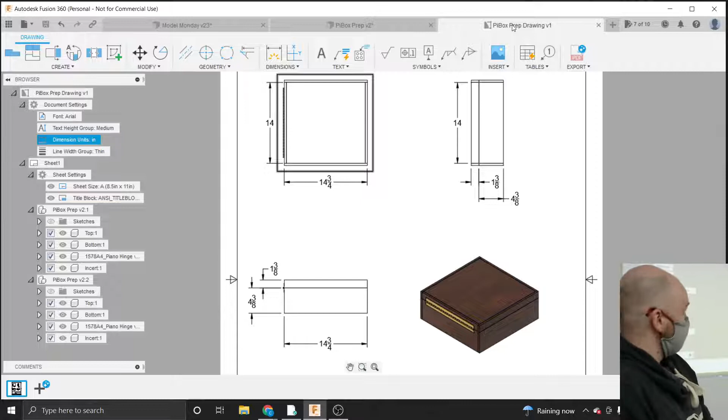Today our project is going to be a fairly simple box - a nice wooden box. Pi Day is coming up on March 14th, and I like to take pies places and share them with people, so I need a box to take that pie places. So I made one. I designed it here in Fusion, and in order to make it in the wood shop, I generated drawing files so I can actually make this thing physically. Without further ado, let's get started.

Let's save that. I'm going to close both of these files, and start a brand new design. This new design is going to be our box. My approach for this box is going to be parameter based.

I like doing these parameter-based projects because for a box, you can put anything in a box, literally. So I'm going to think about this as a box you can put anything in, if you know what size that item is. So instead of starting by drawing things, we're going to start by setting parameters for what's going to go inside our box, and all of our box dimensions will be determined by those parameters.

I'm going to start by clicking on Modify and then coming down to the Change Parameters option. Normally when we draw things, we say let's make a rectangle, and then tell the rectangle how big we want that to be in inches or millimeters. In this case, we are going to type in a user parameter for a dimension.

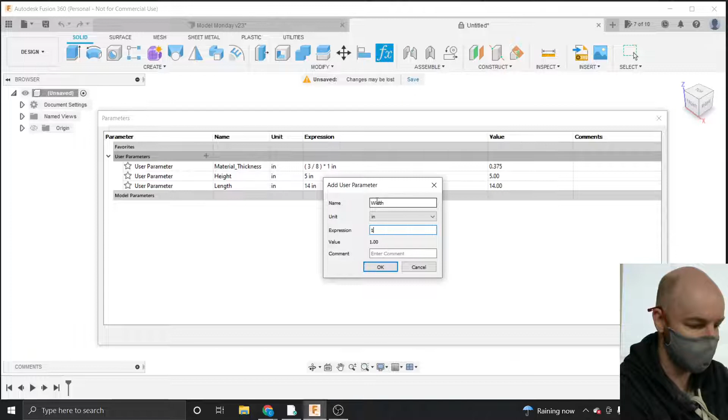Now it's easy to change these parameters and alter our box to fit whatever we want to put in it. So if you got a mug or a coffee grinder or a water bottle or a cell phone, you can measure that object and enter those parameters here for height, length, and width. Specify the thickness of the material you're making, and it will go ahead and alter that box for you. We'll test that at the end of this class, I think.

Does everybody have those 4 parameters dialed in? You guys good at home too? All right, cool. I'm going to go ahead and click OK. And now we can put those parameters to work.

From our Create menu, let's go ahead and choose the box option. A lot of times we start by creating a sketch, but I think in this case it's just easiest to start with a box.

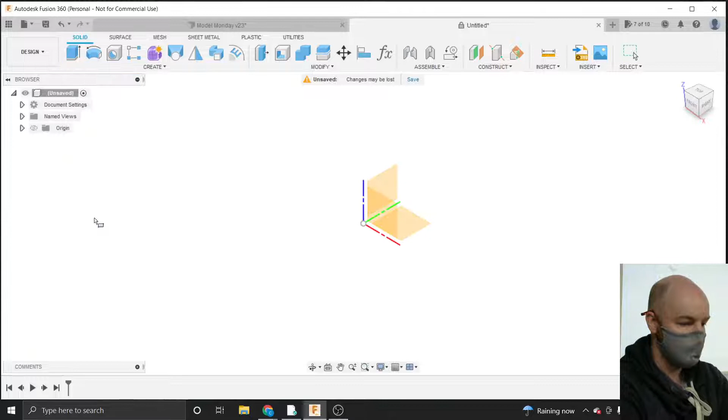Now our box, even though it's a 3-dimensional object, we need to start with a 2-dimensional surface to create the first measurements for our box on. This is a little counterintuitive, but you just need to specify one of these 3 drawing surfaces to start your box on, and it doesn't really matter which one at all.

I'm going to choose this surface that is my top here. So if I want to make sure I choose the top, I can click on the top over here in my navigation cube, and then I'll just spin down so I'm looking straight at it. And now I won't accidentally click on a different plane here.

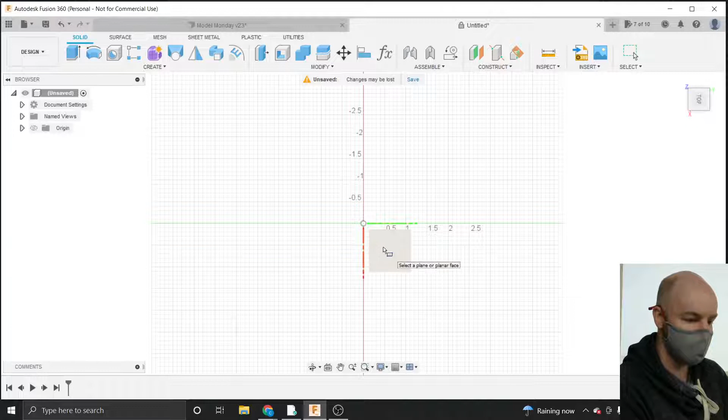The beautiful thing about Fusion is it gives you lots of tooltips. So if I'm ever unsure what to do, if I just stop moving my mouse, it'll tell me here. So right now it says place first corner. So I'm going to do that.

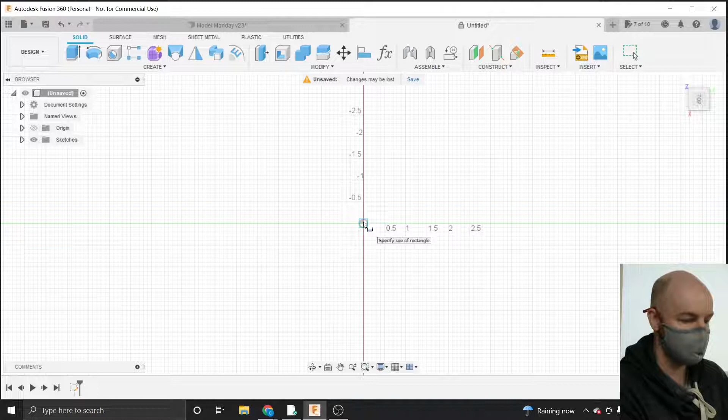I'm going to place the first corner right at the center of where the X and the Y axis meet there. That is the origin. And I'm just moving my mouse out. It's not a click and drag, but it's a click and move.

Now I always encourage people, once they see numbers, they should type numbers. So let go of your mouse and just start typing things. And we could type in like 12 inches, for example.

However, we spent all that work defining parameters. So I can define, if I start typing in length there, you can see my length, any parameter that's got an L in it, apparently, will just pop up there. So length is the one.

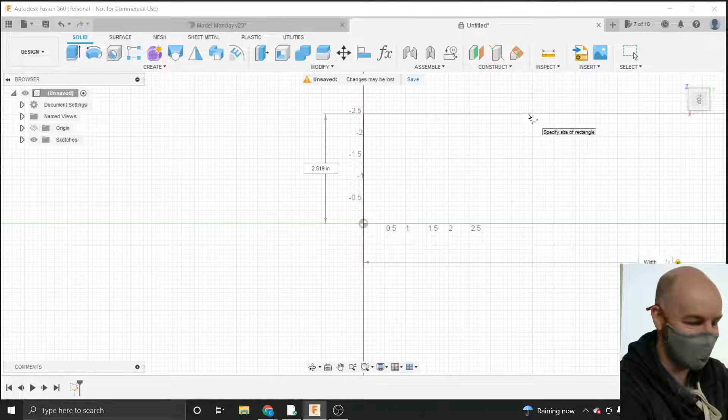Actually, I'm going to make this my width. Oh, did I mess you up, Mike? All right, so width, and then I'm going to hit the tab key to bounce over my other measurement, and length is going to be my other measurement.

Really, these are interchangeable because they're the same units right now, but all right, and now we've got our length and our width specified there, and if I click, now it gives me my box window finally.

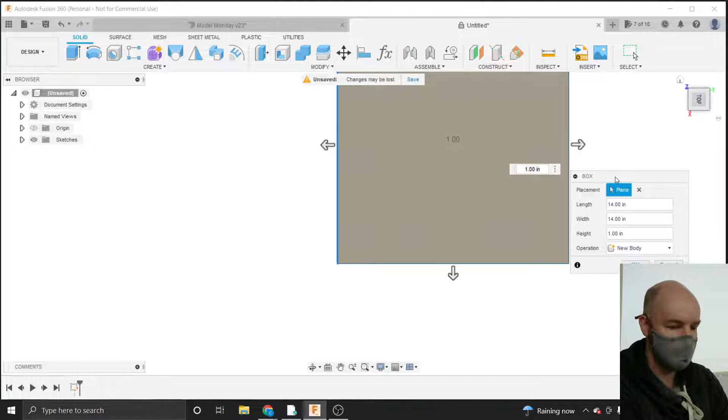And if I navigate my navigation cube in that top right hand corner and zoom out and zoom in so we can see this a little bit more 3-dimensionally, now you can see I've got a height measurement that I can enter in here, and that height measurement is going to be my user parameter that I created that's called height.

Now it goes ahead and converts some of these user measurements for you right away, but I can go ahead and change these so just so you're sure that I entered in length, width, and height. Those are those user parameters that I created for my length, width, and height of my object. In this case, nice delicious pie.

So once we've got those 3 measurements in, I can go ahead and say OK. All right, so we've got a box here. We've got a cube, I suppose you could say. Does a cube have to have equal sides? Anyway, regardless, we've got a 3-dimensional object here.

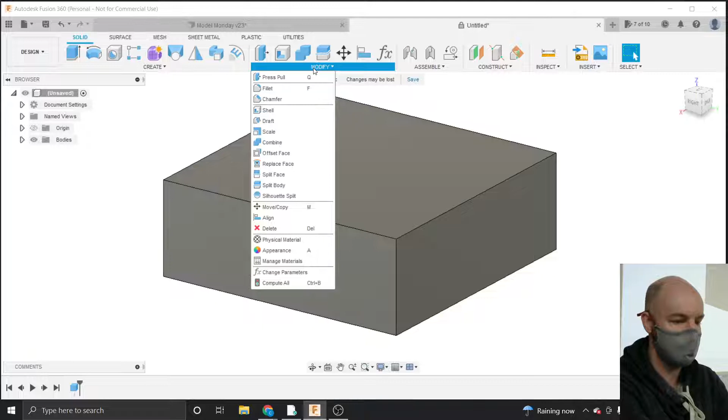And in order to make our 3-dimensional object hollow, like a box is, we can use the shell command. There is a single command in the modify menu that will take this box, this cube, and make it hollow. So if I click on modify and then come down to this shell option.

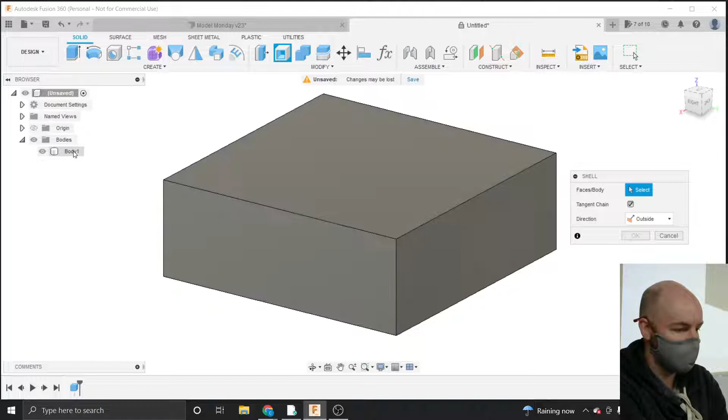Now I could specify one of these faces, and that would make kind of like an open box, but I want to have a closed box here. So instead of specifying one of the faces, I'm going to specify the body that I want to make a shell of. So in my bodies folder over here in my browser on the left hand side of the screen, if I spin down my bodies folder, I got a body inside of that, and if I hover over it and click on it, it'll choose that body in my shell window here.

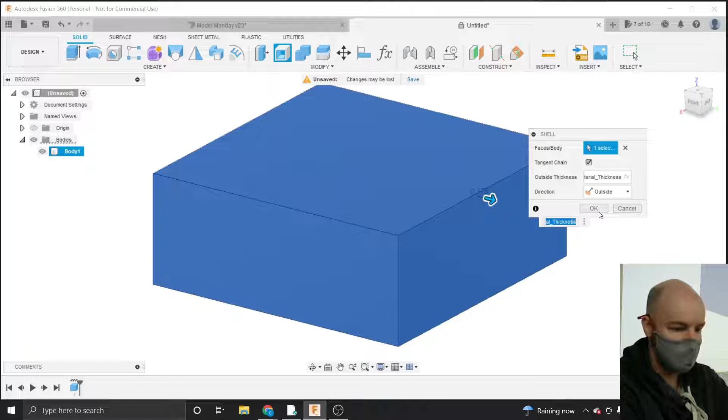And now I can specify a direction. In our case, this is going to be outside. So we specified the dimensions of the object that we want to put in a box, like I said, in our case, pie. And so we want to make a shell that extends outside of that space. And our thickness, the outside thickness, is going to be what I call the user parameter that I called material thickness. You can see if I change this from inside to outside, the change that happens there - either that's building the walls inside of that space, or it's building the walls outside of that space. And then I'm going to go ahead and say OK.

Alright, I always encourage people to name things as they go. So I've got a body here in my bodies folder, and I'm going to call it box. In order to rename things in your folders, if you click on them one time and pause, then click on them a second time - so it's not a double click, it's click, pause, and click - then you can specify whatever name makes sense in your brain hole to name things.

Now, right now, you just kind of have to take my word for it that this is a hollow object. Because we don't have any openings, you kind of have to take my word that it is indeed hollow on the inside. And I can prove that to you in a couple of steps here.

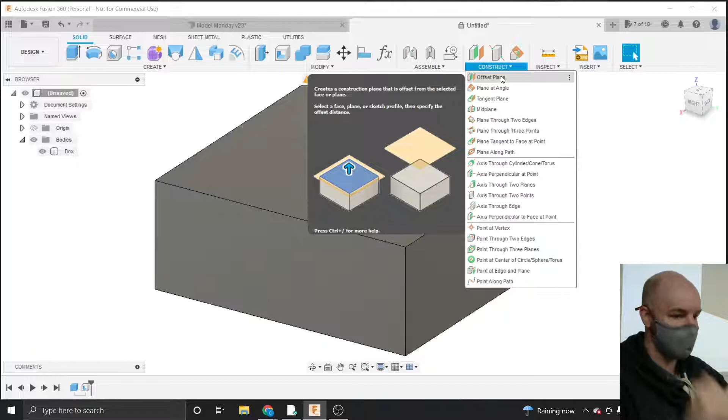So the next thing that we want to do is we want to split our box into a top and a bottom. So I'm going to come up here to my construct menu, and I'm going to construct an offset plane. So a plane is an invisible piece of paper, let's say, that you can specify in space, and then on that invisible piece of paper you can draw sketches on it. You can use it to cut bodies, which is what we're going to do. So I'm going to go ahead and choose that offset plane option.

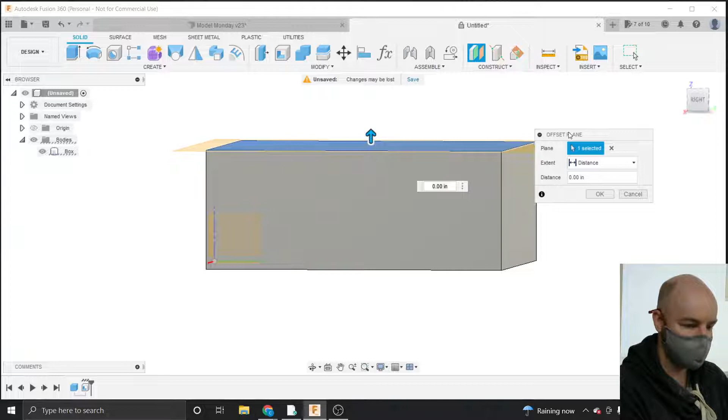I'm going to specify either the top of my box or the bottom of my box. Either one is fine. If I click on the top here, you can see I've got a little arrow, and I can click and drag on that arrow and I can move it in some direction. So if I go down like -1.5 inches, seems like a good box lid.

Positive 1.5 inches will bring, for me, this plane up. However, sometimes negative and positive in Fusion is different for different users. So the key is we want our plane, you can see it slicing, intersecting with our three-dimensional object. So that's what we want here. I'm going to go ahead and say OK.

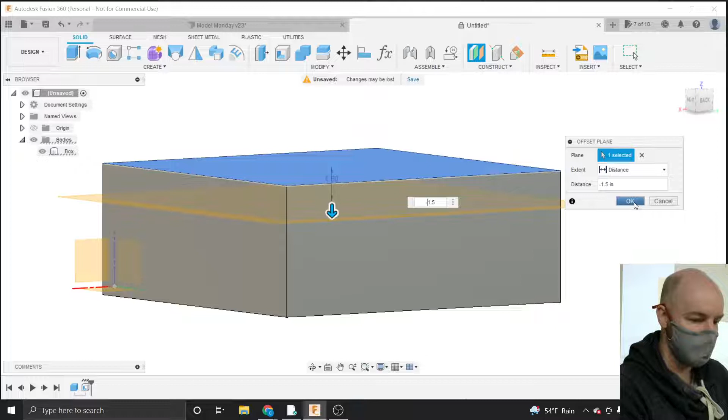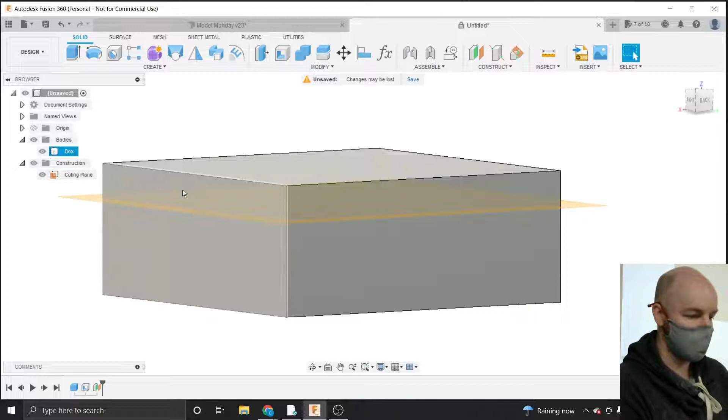Now I've got a construction folder that's appeared over here in my browser on the left, and in that we've got a plane. That plane, I want to go ahead and name that - this is going to be our cutting plane. So that's the plane that we're going to use to cut our box up. And I'm going to do that right meow.

So in the modify menu, I'm going to come up to the split body option. And the body that I'm going to choose to split, I can either click on here in my drawing view, so I can click on my box in my drawing view, or I can click on it in my browser. So this is a great reason to name your bodies in your bodies folder, so it's easy to select them if you know what they're called.

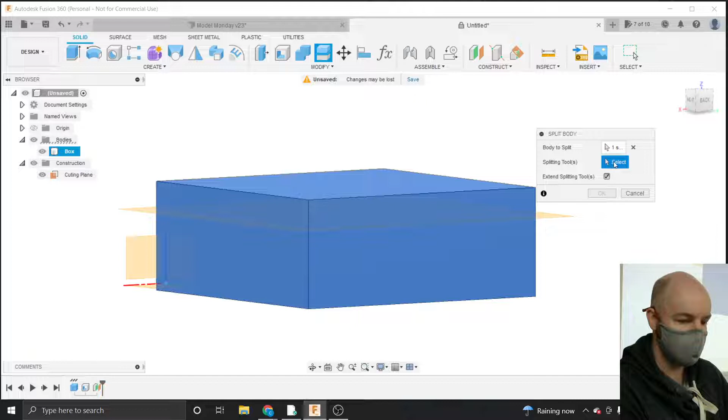I'm going to choose my splitting tool here in my split body window. And again, here I can either do that by clicking on the plane here in my drawing view. However, sometimes it's difficult to see the plane, or your plane might be kind of small, so you can also click on the plane in your construction folder. You can see it's made a little red indication of the part of the box it's going to cut up. And I'm just going to say OK.

Alright, we're done with that construction plane, so I don't need to look at it anymore. I'm going to go ahead and hide it just to get rid of some visual clutter on my screen.

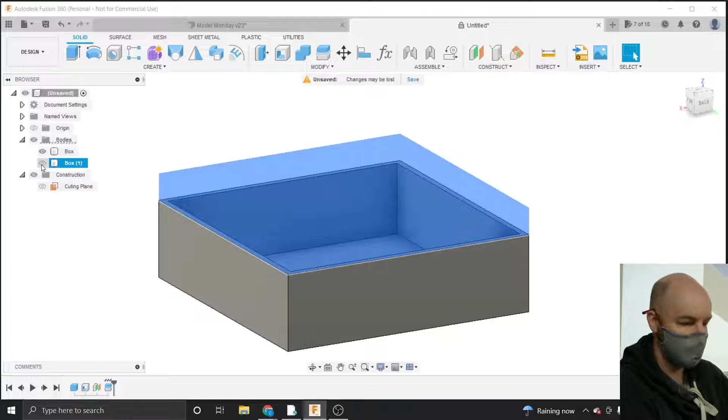Now we can see instead of one body in our bodies folder, we have two of them. If I hover over them, they highlight, so I can see I've got a top and a bottom. The same way we just turned off the construction plane by clicking on the little eyeball, I can turn off the top of my box. Now I can finally prove to you that my box is totally hollow on the inside. It is indeed a box.

Alright, so normally for normal construction we don't need to do this. Maybe I should talk about a little housekeeping or organization while we're here, since we got some new people. Am I going too fast for anybody? Are you guys all keeping up? Keeping up? All right, cool, good good.

So Fusion organizes things by components, and then inside of components are bodies, sketches, and construction planes. Right now, over here in my browser, you can see I've got one component. This component is called unsaved because I have not saved it.

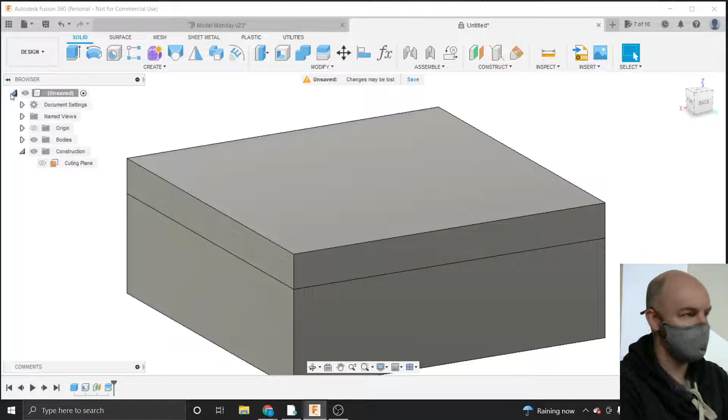You should probably -- you know what, let's save it right now. There's always a good time to save, right? So I'm just going to click on the little floppy disk icon -- everybody will recognize that 3.5-inch floppy disk in the top left-hand corner. I'm going to call this a PiBox.

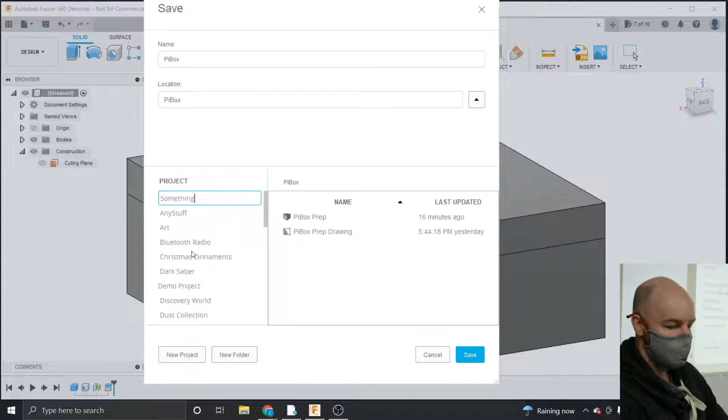I have already created a project called PiBox. So I encourage people to start a new project -- you can click on New Project and name it something. Now you can click on that project you just made over here, and then say save, and it will save this document inside of your project. I'm going to save it in my PiBox project here that I created earlier.

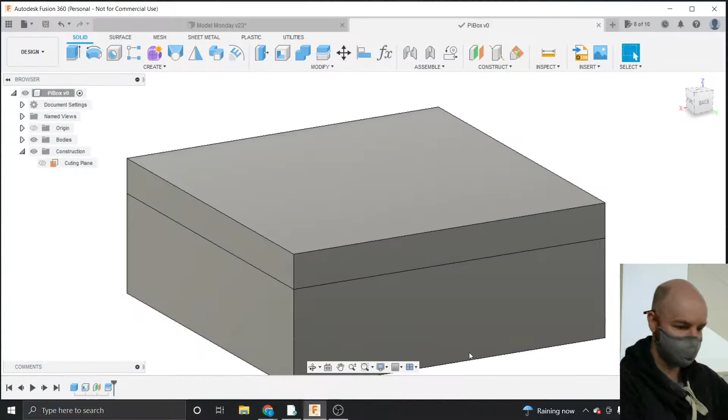So now you can see we've got one component. That component has a couple of bodies in it, and it's got a construction plane in it. What's that? Oh, okay, sorry, alright -- so the speaker is kind of in the middle of the room, so every once in a while I hear something and I'm like, oh, does somebody have a question?

Alright, so we've got two bodies here, and I'd like to take these two bodies and turn them into components, because what I eventually want to do is add a joint. In order to add a joint, you have to have more than one component, because you make two components work together in your joint. So what I need to do is take these bodies and convert them into components.

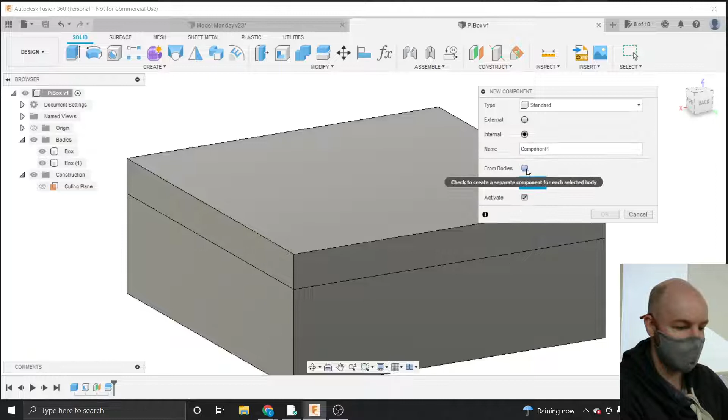The way we convert a body into a component is from the Create menu. I can come down here to the New Component option, which is the very top option. A lot of times we'll just make a brand new component and start creating sketches inside of it, but here we've already got bodies made for us, so I'm going to choose the From Bodies option -- this little checkbox that says From Bodies. Now I can click on the two bodies I want to turn into components and say OK.

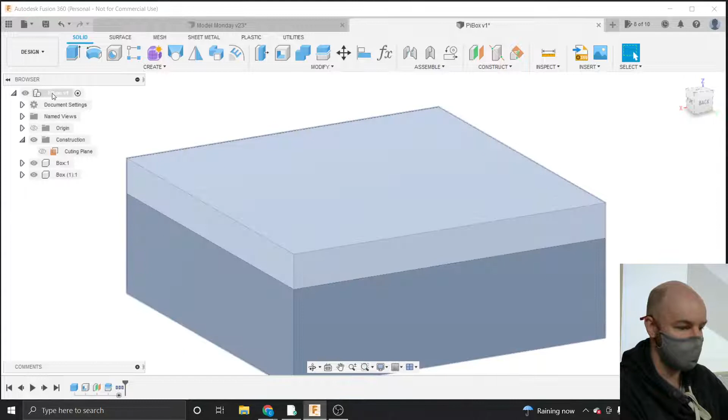So now it took that bodies folder in my main document component and split it up into two components down here. The same way I renamed my bodies, I can name these components -- so I've got a component that is the bottom, and then I've got a component that is the top.

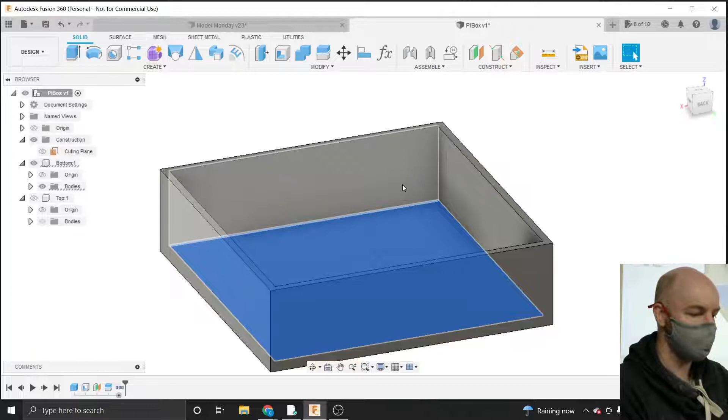I'm going to turn off the visibility on my top component, just so I'm looking at the bottom. Right now this body is all made of like one piece, and that's not how wood works, so we'll need to break this up into panels. I think the best way to do this is with the tool we just used -- the split body tool, which splits one body into multiple bodies. We can do that again to create the various sides of our box. So from the Modify menu, I can choose that split body option.

I'm going to spin around just for my own sanity, so I'm looking at the front, as labeled here by Fusion 360. I'm going to specify the body that I want to split. I can either do that in the drawing view, or in my bodies folder over here.

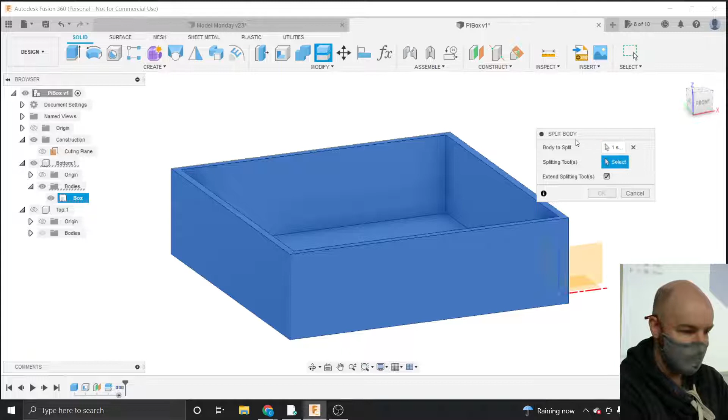Oh, you know what, I may have gotten ahead of myself. Did that work? Oh, it did. I'm actually surprised that worked. So as a best practice, let me redo that.

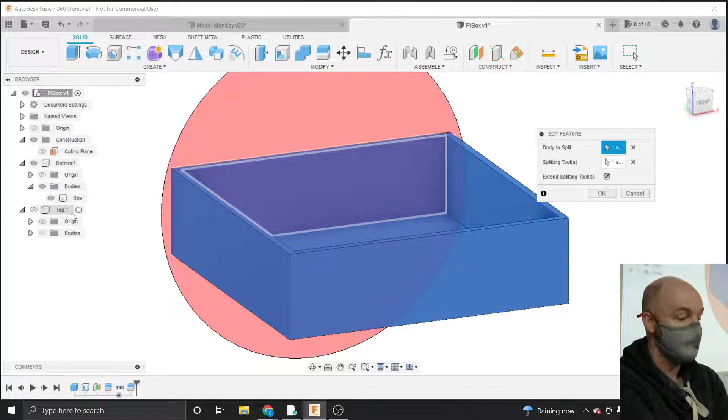As best practice, we just had one component initially when we started doing this drawing, right? We just had our one document component here. Now we made components from bodies, so now we have several other components here. And as kind of a best practice, what we should be doing here is...

Making the component that we're working on active, and then doing anything we want to do inside of that. So in order to make a component active, you can see this little radio button is clicked here on the main document component. Because I'm working on my bottom component right now, best practice would be to make that my active component by clicking the little radio button next to it.

If I turn my top visibility back on, you can see it's kind of ghosted out here. That's how you know you've got a component active: other components become ghostly images of themselves. The reason we do that is if we're creating a sketch, it's going to make sure it creates it inside of the sketches folder inside of our active component. Or if we're making a plane, it creates it inside your active component. Sometimes when you're extruding something, it'll extrude into your active component.

So I'm actually surprised it worked the way I did it before, but best practice would be to check that little radio button.

And now I'm going to go to that split body again. I'm going to choose the body that I'm going to split. Oh, I picked the wrong option. Modify, split body.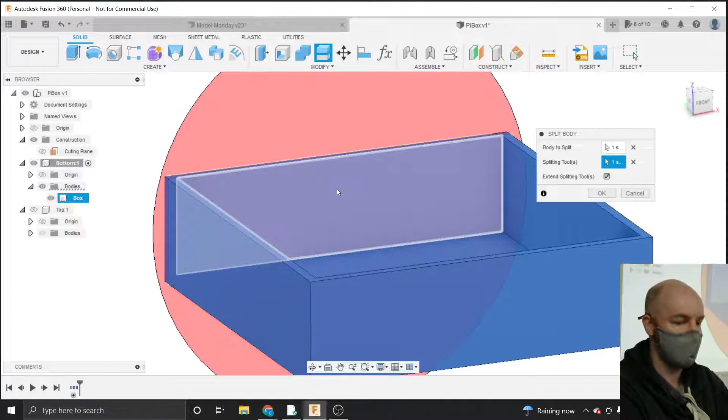I'm going to pick the inside back face of my box, and spin around and pick the opposite face over here. So I'm going to split those two sides off—sorry, the front and the back, not the two sides. And I'm going to say OK.

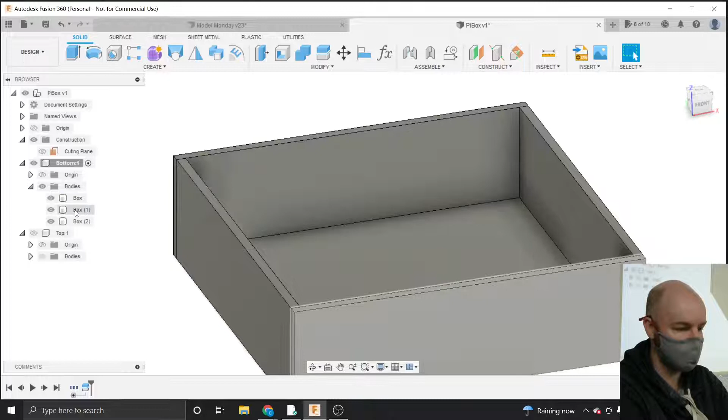So now you can see my number of bodies over here has gone up. I now have 3. And I'm going to do that one more time.

So I'm going to come up to the Modify menu, choose to split a body. The body that I'm going to split is, I guess, this guy right here, which you can see if I spin this around spans those two sides. And the splitting tools are going to be, again, those inside faces. I'll go ahead and say OK.

Now, instead of one body, I've got 5 that represent each of the faces of my box. And I could turn off the visibility, and now we can see that this is something we can actually generate measurements for, and take measurements of, and go make for real.

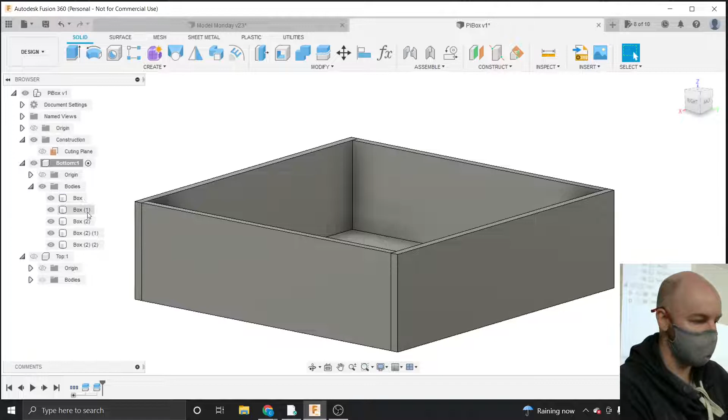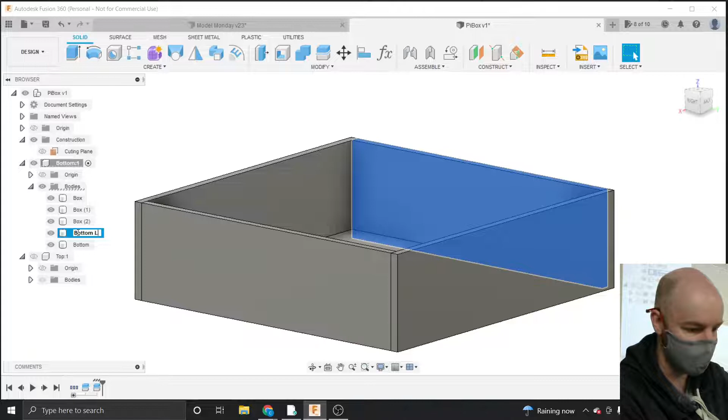I would normally recommend spending time to name these things, but for the interest of time in class, I'm going to skip naming them. For example, this would be my bottom, and this would be my... I guess that's my left.

So I would go through and make sure to name those things so they all have unique names—just best practice. But for right now, I'm just going to close down my bodies folder, because I want to do that exact same procedure on my top.

So if I turn the visibility on my top on there, and then make my top my active component, I'll turn off the visibility on my bottom, and now I can look inside of that.

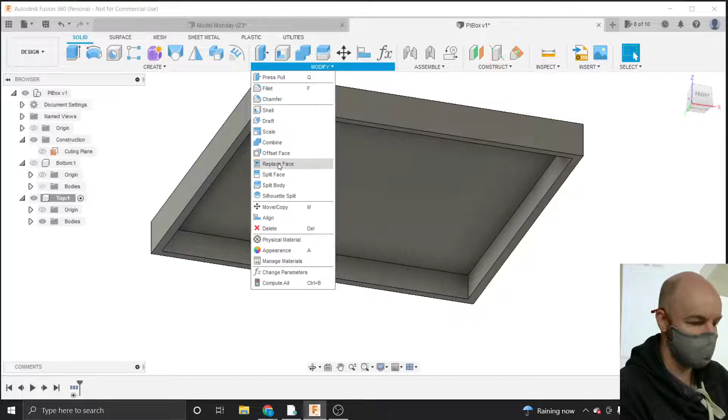And then again, we want to do those exact same procedures here, so splitting those side walls off. From the Modify menu, I'm going to go ahead and choose to split body. The body that I'm going to split is my...

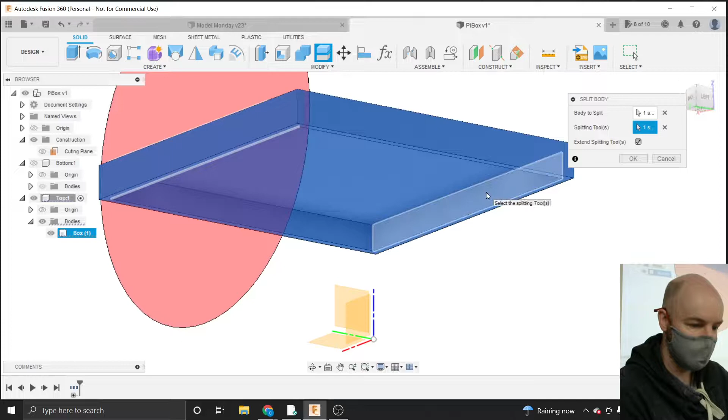box body that's in my top component. And then I'm going to split the front and back off first. So I'll spin that around and click on those inside faces for the front and back of my box top, and I'll say OK.

And then I'm going to do that one more time. Modify, split body. I'll specify this 3-sided object here, and the splitting tools, again, are going to be those inside faces.

And I'm going to say OK.

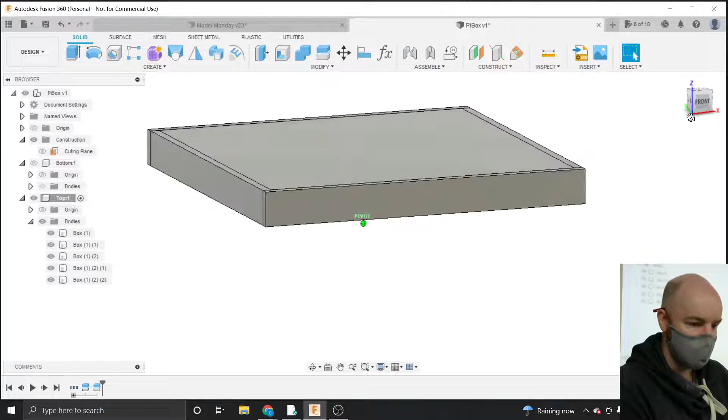All right, cool. So we've got our box here. I'm going to close down my bodies folder by spinning this little triangle - you can hide or show the contents of that folder. I'll turn back on my visibility on my bottom component, and now I'm going to make my PiBox main document component my active component, so we can see everything here. So we can see we've got a box.

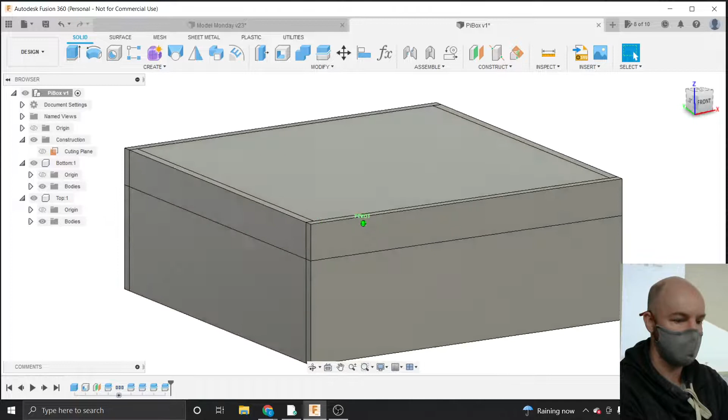Now, I'd like to, just for fun, animate the opening and closing of this box, just because it's a fairly simple procedure. And the whole reason we had separate components is so I could show you how you can add some animation to your models here in Fusion.

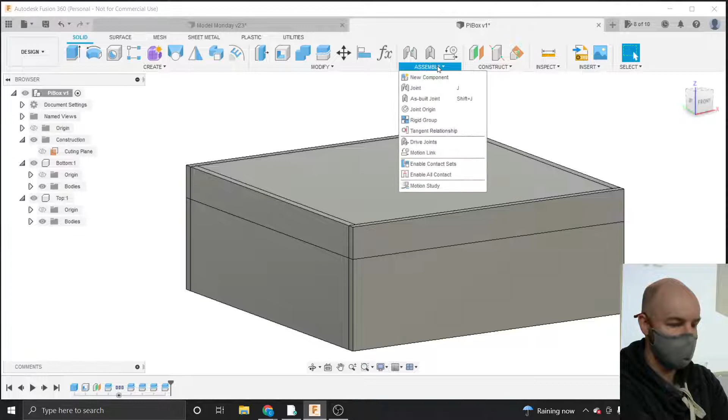So I've got my main document component as my active component, and that's important because when we come here to the Assemble menu and choose the as-built joint option, it'll make that joint inside of my main document as opposed to inside of one of these in my top or bottom component. So I'll go ahead and choose this as-built joint.

Now the joint type that I'm going to make here is a revolute joint. Yours may default to rigid, and you can see that there are many types of joints that we can make, but we're going to choose to make a revolute joint.

And we're going to choose the components now that are going to be making up that joint. As a rule of thumb, when you're making joints, the first item you click on is the thing that's going to do the moving. So if I were to click on the bottom of my box first, and then the top, when I move that joint, the bottom is going to be the one moving. That probably doesn't make sense - well, I guess it does since there's no table here in this case, but we're going to click on the top component first, just so it looks a little better visually. And then I'll click on my bottom component second.

And now the last thing it wants us to do is choose what it calls a snap - this is the axis that it's going to rotate on. I'm going to spin around so I can see the back of my box here. And as the axis that I'm choosing, I'm going to choose this line that splits my two bodies in half, my two components in half there. And if I click on that line,

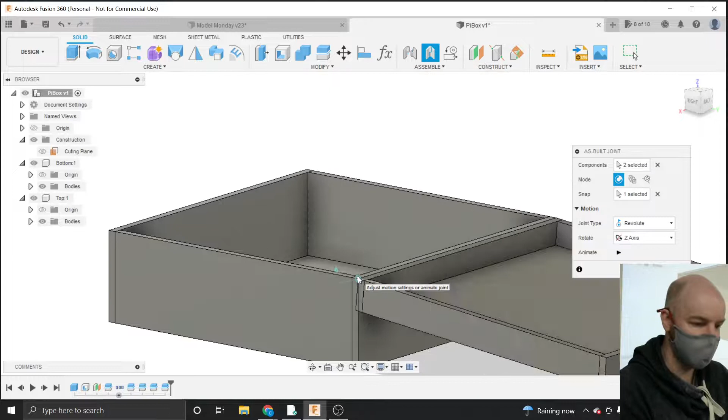then it'll give me an animation where it bends the box through the fourth dimension, apparently, and shows you what that joint does. I just click this animate button here, and it'll animate that joint and show it to you.

Alright, I'm going to say OK here because that is kind of what I wanted to do.

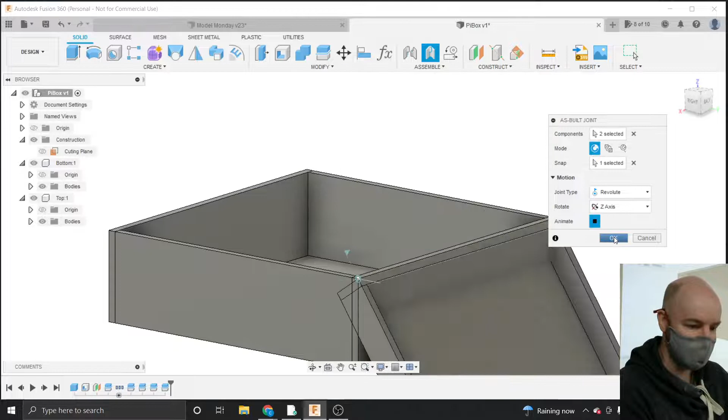Did you guys figure out, did you get your joint working at home? I mean, it's none of my business if you got your joint working at home. If you're joining me from like Michigan or Illinois or Colorado - but if you got your joint moving in Fusion, hopefully, all right, cool. The joint on my box works.

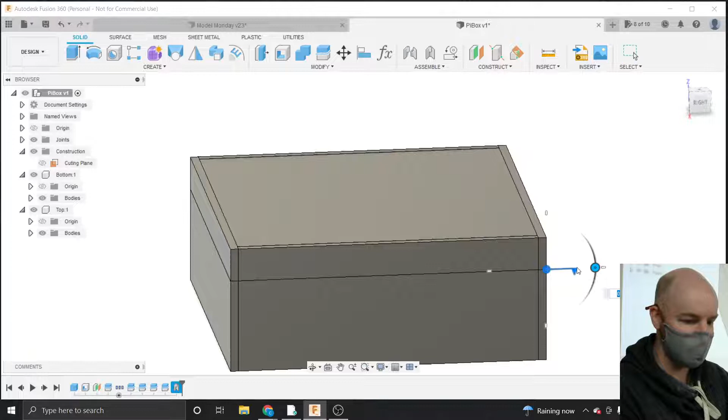Sweet. All right. So our joint works, but let's do one more thing just for fun here. I can do things to my joint that defy, I don't know, let's say the laws of thermodynamics. So I'd like to fix that. In order to do that, we're going to set some minimum and maximum points on our joint here.

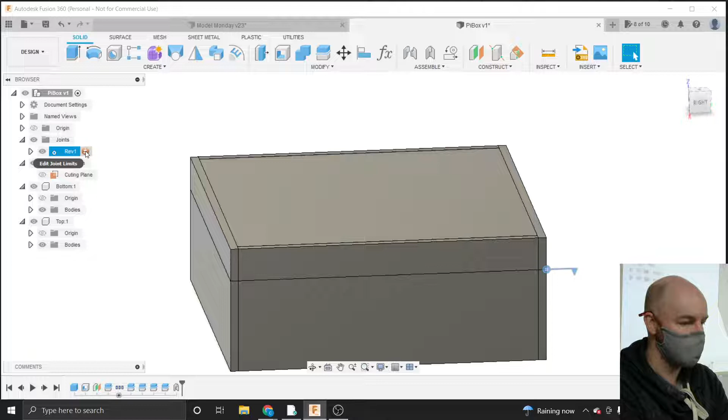So in the joints folder over in our browser, I can spin down that little triangle. I can see this revolute joint here, and if I hover over it, there's a little orange button that pops up next to it that says Edit Joint Limits. And if I click on that, I can set a minimum and a maximum, and I'm going to do that.

So the minimum is fine where it's at - the minimum is good there. It's just this guy - maybe let's make it 100 degrees or so, just so there's something there. Obviously, I guess it could go further. It could go - I mean, in reality, we'll have a hinge here somewhere, right?

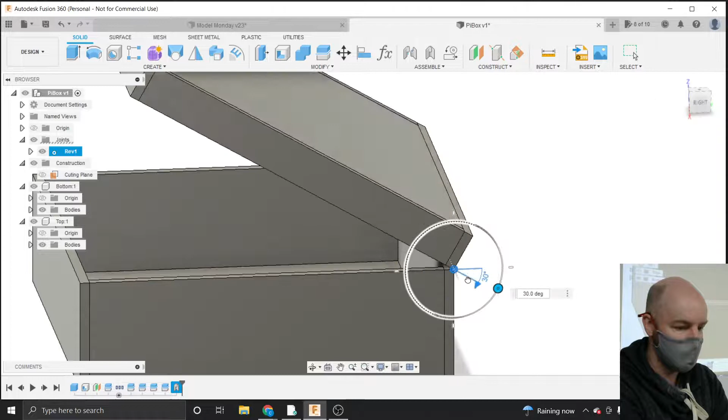So if I set those minimum and maximums, now it won't let me bend the box through the fourth dimension. It will only go to those couple of points there.

All right, so I'm going to say OK here. Now the last part of class I want to focus on is making this real. This is Makerspace, we actually like to make physical things here. It's a wonderful thing.

In order to make this real, I want to be able to take this into the wood shop, but I don't want to have my laptop in there. I want a piece of paper so I'm not getting sawdust all over my laptop. I hate it when that happens. So I'm going to go ahead and save this file here, just Command S, Control S, or hit the little floppy disk icon up top.

Now, to create a drawing from this file, if I click on the File menu, the fourth option says New Drawing, and we're going to make a new drawing from Design. The drawing refers to a piece of paper that's got dimensions on it.

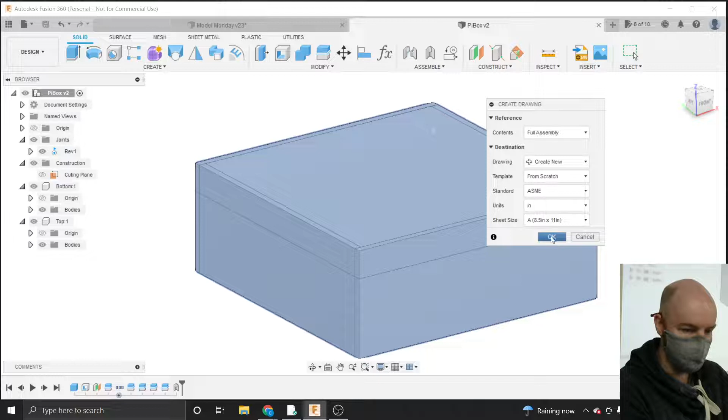We get a little Create Drawing window that pops up here, and I can specify that I'm going to be printing this out on an 8.5 by 11 sheet of paper. I'll say OK. That opens up a new tab, and now it's given me an object to place.

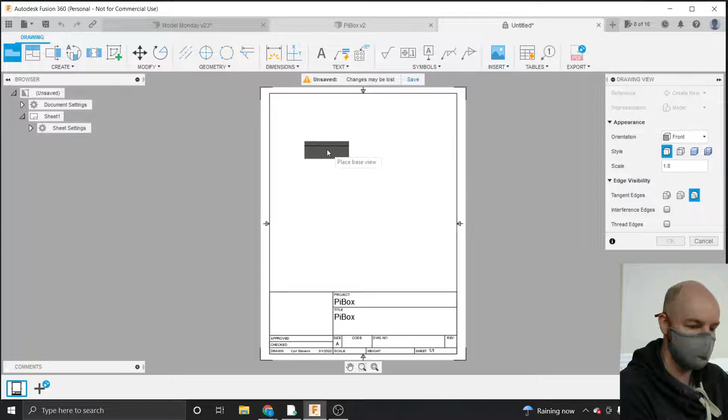So this is apparently the front of my box. If I place this, just click to place it down here, now I can specify the scale and some more specific things. I worked for a blacksmith for a little bit during the pandemic, and he turned me on to scale.

A scale like 1 to 8 means nothing to me. It really makes more sense to have a scale that's inches to feet, because you should be able to walk up to your drawing with a ruler, measure something, and convert that to how big it is in the real world. In theory, you can do that if you use these inch measurements down here.

So if I say 1.5 inches equals a foot, it didn't really change that much. But if I say 1 inch equals a foot, now if I measure this after I print it out and something measures an inch, I know that's a foot in the real world. So it makes much more sense to me to use these kinds of measurements. I'm going to do this 1.5 option.

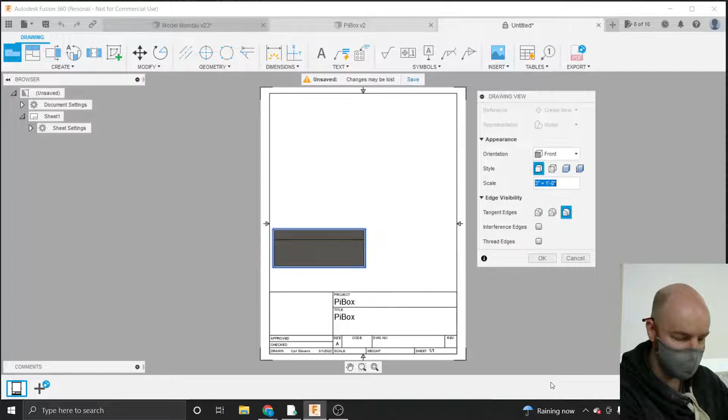Maybe I can do 3. Can I do 3 and still fit it on the page? Probably not. I'm going to do 1.5.

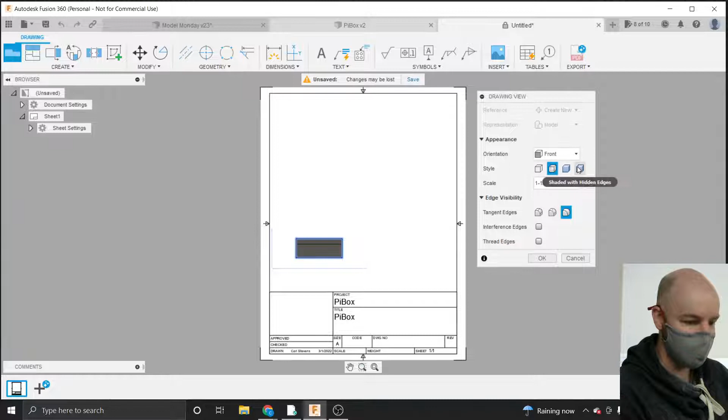I can specify what face or side I'm showing here. For our case, I think front is the right way to go. And I can specify how I want that to be visible — I can show it shaded, just show the outside lines, or show through the box to any invisible lines that might be hidden on the back side of our object.

But I'm just going to choose this first option. If I stop moving my mouse, it'll probably tell me what that's called — visible edges. Alright, and then I'm going to say OK here.

Now it's placed that box, and I can click and move this anywhere here. But this would be really helpful if I could see the top and the side of my box as well, so I can do that by creating projected views.

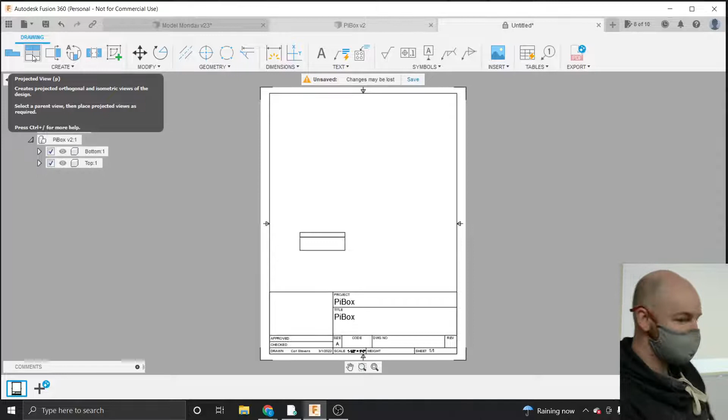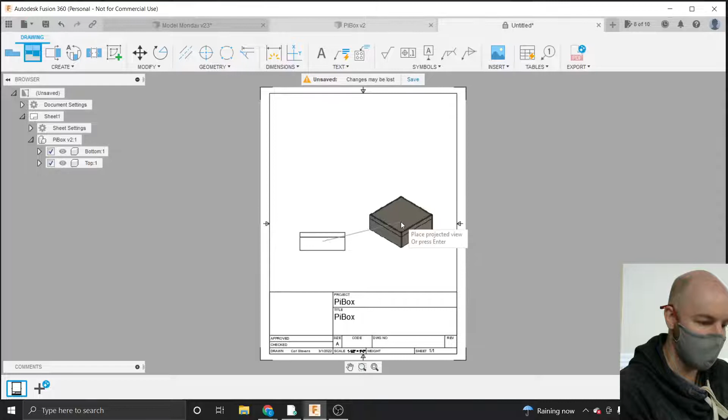In my Create menu here in the drawing world, I can say Projected View, and now I'm going to select the parent view, which is that object I placed. If I move my mouse directly off to the side, I get the side view of my PiBox. If I move it directly up above, I get a top-down view. And if I move it off at an angle, I get an isometric kind of view.

So I'm going to click and place a top view. I've got that there. And I'm going to go over here and click and place a side view directly along the side of it.

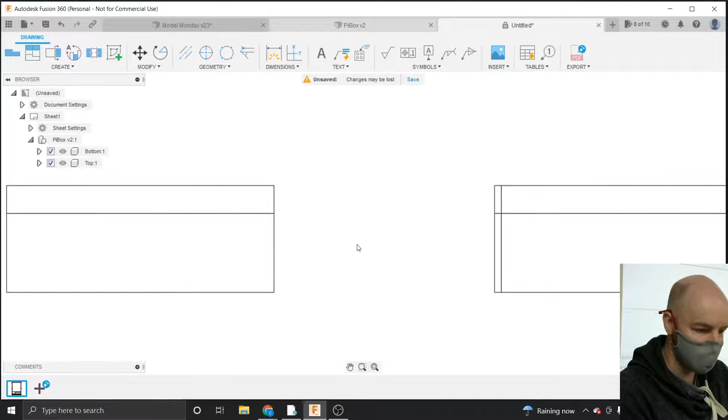And now I'm just going to hit the escape key because I'm done placing those views. I'm going to zoom in here because I realize it's a little bit difficult to see on the screen. But now you can see I've got these drawings here.

Now the real key here is to place some measurements so you know how big these things are. So if I, from my dimensions menu, choose the dimension option, I can hover over any line segment, and if I click on it one time and now move my mouse out, now I can place that measurement.

As a point of note, in the browser here in your drawing view, I think it's in sheet settings. No, is it document settings? Yes. All right, so in the document settings, if you come over here to dimensions, units, inches, and click on

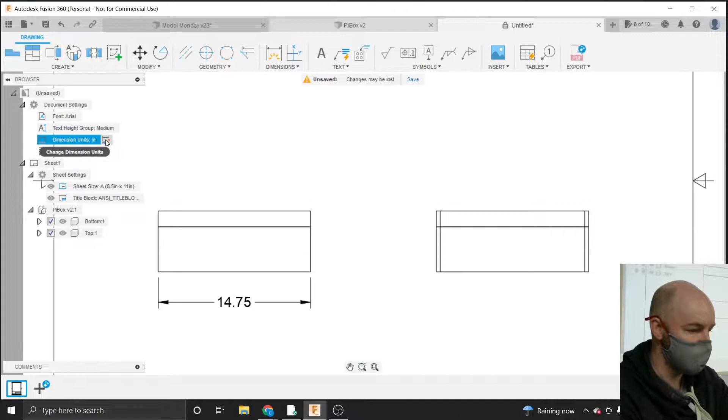the little button that pops up to the right of that text, you get a document settings window here, and I can specify how many decimal places I want to see shown there, so the precision that it shows. I can also change this from decimal to fractional.

Sometimes when you're doing stuff in the wood shop, it makes sense to talk about fractions. If you're doing stuff in the machine shop, maybe it makes sense to talk about decimals, depending on how precise you're getting. But here, because this is a wood shop thing, I'm going to turn this to fractional, and maybe I'll make the precision like a 1/16 of an inch there.

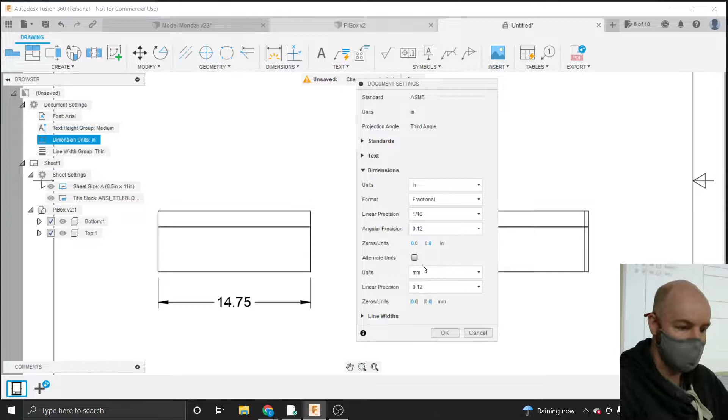And then I'm going to say OK. So then it goes ahead and converts that to the fractional measurement. So I'm going to go ahead and place some more dimensions here.

So I'm going to place dimensions for how big I'm going to need, how wide I'm going to need to cut each of these boards. So there's a 4 1/4 measurement. I don't have to get my dimension tool every time I place a dimension, so I can just kind of keep going here and place all of the dimensions for my drawing.

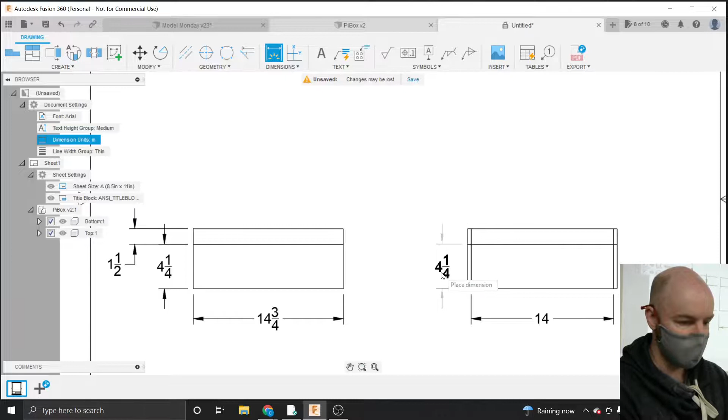I've got some measurements over here, so while that's 14 3/4, this board is only going to be 14. However, the heights of these you'll find will be the same.

In addition to clicking on a line segment in order to specify a length, I can also specify 2 points. So I can click on the first point and then click on the second point and then move my mouse out to place that dimension.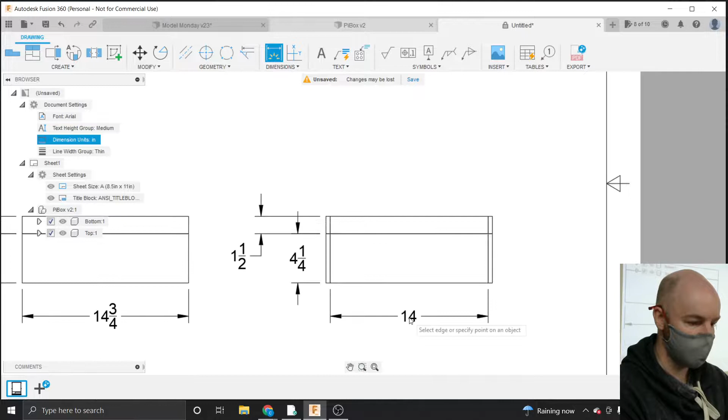I'm going to do that for the top here as well, even though these measurements are going to be exactly the same as my first 2 measurements.

I've been told by people that there's a specific way you're supposed to make this drawing. In fact, if there's anybody who knows a specific way that these drawings are supposed to be made, I only know a couple rules of thumb.

So the rules of thumb that I've been told are your dimensions should always go the same way. So if my dimensions always go to the right and the bottom on all of my measurements, they should go to the right and the bottom on all of my views here. I shouldn't have dimensions that randomly come off to the other side on both sides of an object.

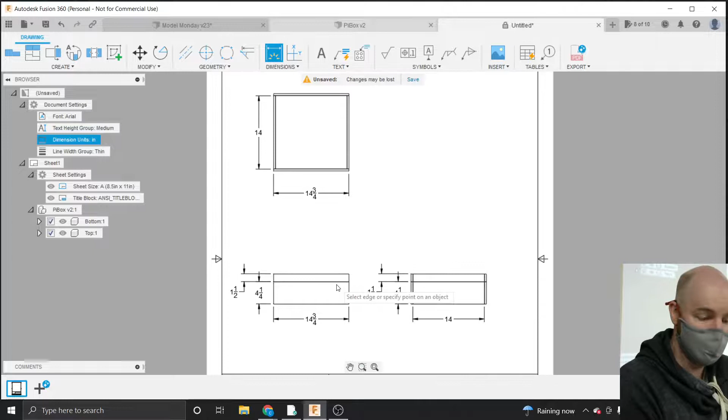I don't know why that's true, but maybe it just makes it more legible. In any case, so that's the rule of thumb there.

And then the last thing that I'm going to do here is kind of an optional thing. I like to have a 3-dimensional view of the object that I'm making here on my drawing. So from the Create menu, I'm just going to come up and make a new base view.

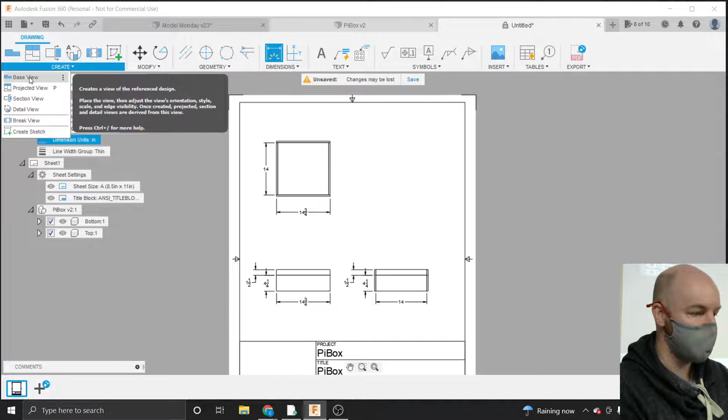And that base view, I'm going to change that orientation so it's one of these kind of isometric from the top kind of things. And I'll click and place that. And I'm going to make that the same scale as I made the first base view, just because you probably shouldn't have multiple scales on one drawing. That's just bad practice. And this time I'm going to choose to make it a shaded style.

And I'll say OK. And there we go. Now we've got our drawing.

So we've got 10 minutes left. And with that 10 minutes, I want to show you kind of why we started.

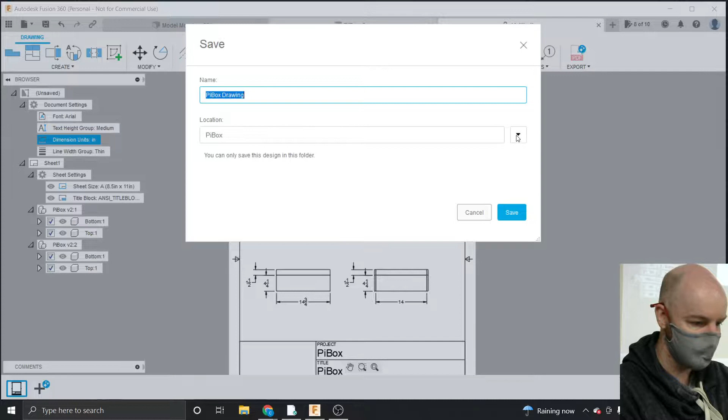Let me save this. Saving is good. Saving my PiBox drawing. I'm saving it in my PiBox project here.

Alright, so now if I go back to my original drawing, we started with making parameters, and now let's say I've got a whole new object. So if I come up here to modify and change parameters, like, hey, it's not PiDay anymore, now it's Cupcake Day.

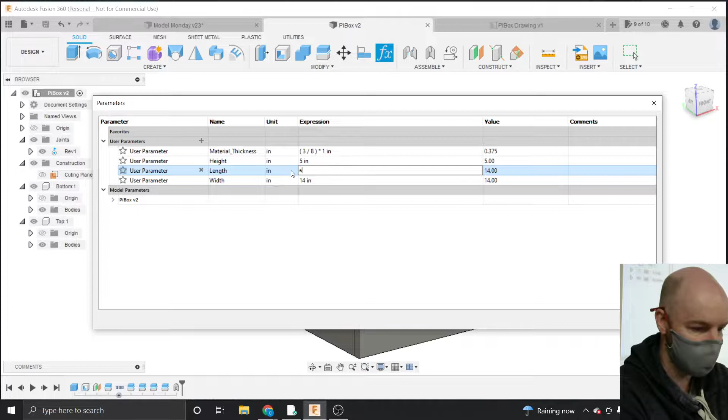So if we want to make our box fit a cupcake, we could do that. A cupcake is much smaller. Let's say it's 6 inches by 6 inches, and it's a real tall cupcake for whatever reason, because it's got a candle on it. It's 8 inches tall, and there's no need to make it out of 3/8 material. Let's make it out of 1/4 inch material, because it's only a cupcake. It's not like it's important.

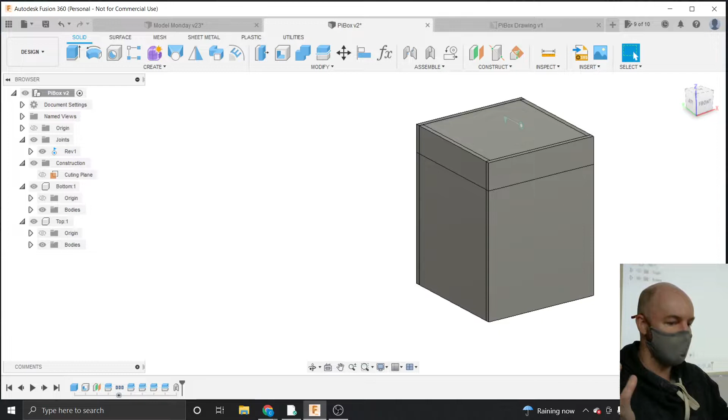So then I'm going to say OK, and you can see that it has gone ahead and changed my box. It's made it a box for a whole different thing. In fact, my joint even worked, which is kind of cool.

And not only that, but if I save this and I come back to my drawing, I've got a little updated warning, I guess. If I click on this warning up in my top, it updates everything in my drawing, which is super cool. These drawings are linked. Now I do have to move some of these measurements out for some reason.

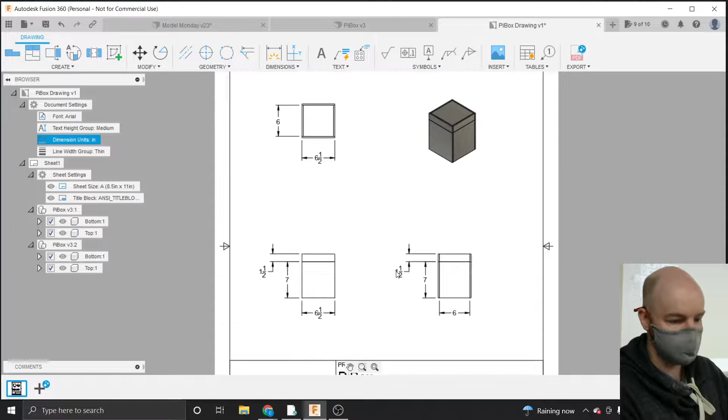They hovered over there. And we could change the scale here now because we can afford to make these bigger. This could probably be 3 inches equals a foot now, or even more. But that's kind of the main reason for using those parameters, is now this can be a box for anything. It doesn't have to be just a PiBox. It could be a gift box for whatever you're making.

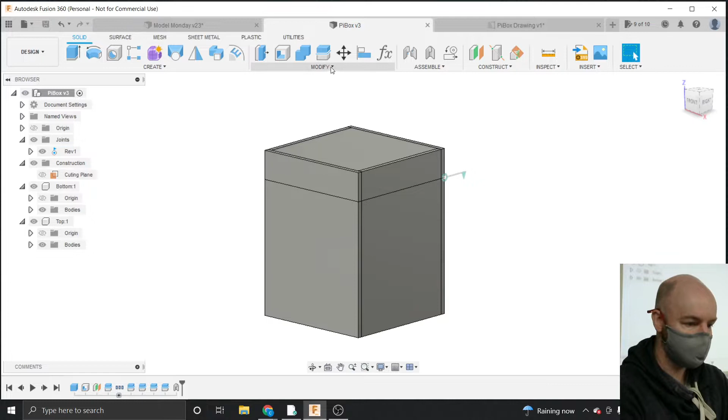As just kind of a last bonus here, from the Modify menu, if I come down and choose this Appearance option, this is something I've been doing more and more in class. Sometimes we talk a lot about organization of folders and components here in class, but it's also nice to organize things visually. And I organize things visually in my drawings by adding material appearances here.

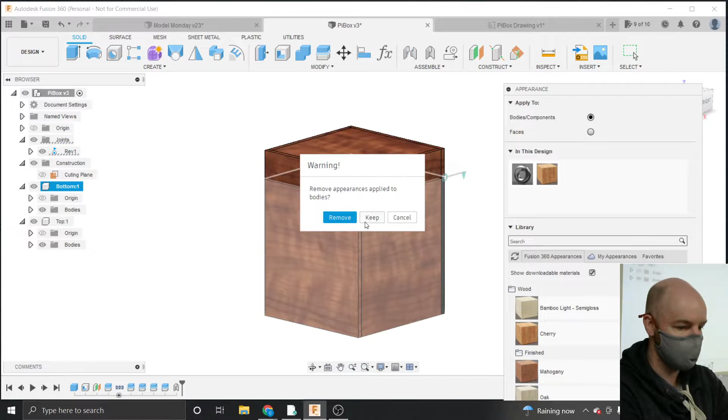So if I find this cherry, this nice cherry, I can click and drag this out over my bodies. I think I can drag it on the components over here too, and then it'll color all the bodies in that component, so I don't have to drag them out on each individual body. So now I've got a nice cherry box here.

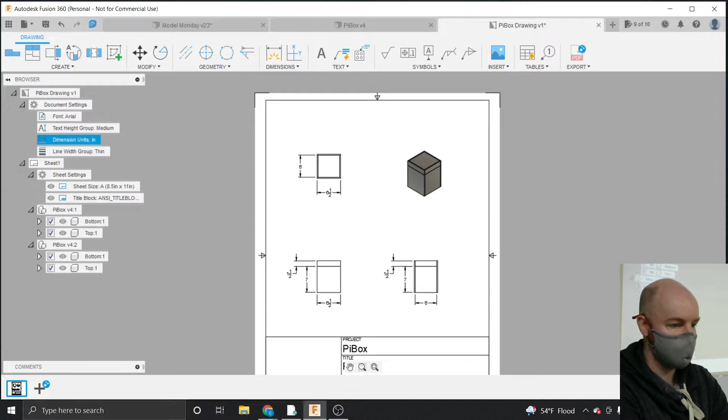And if I save this, because in my drawing view I chose to make this a shaded base view here, if I update my drawing, it updates with those materials applied to it.

Cool. So that's it. That's our PiBox. I'm going to change my user parameters back here because I can. That's 5, and this is like 14. That was like 14, and this is a 3/8 inch box there. And just like that, we got our box back.